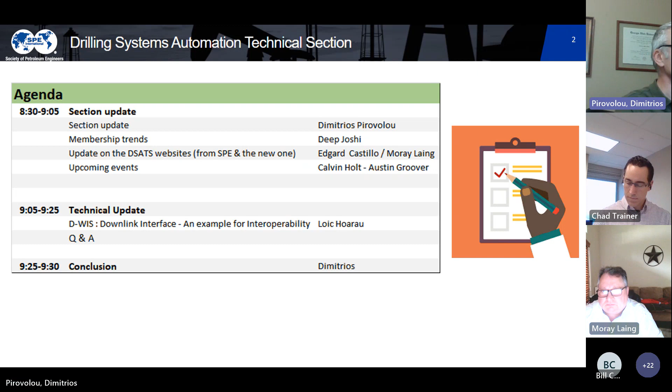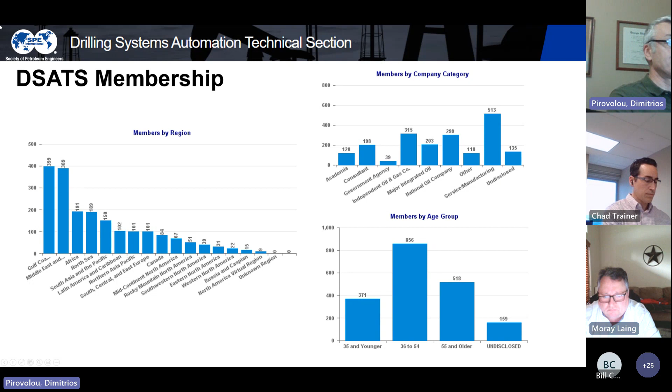Good numbers there. The next couple of slides, maybe Moray can walk us through, shows the activity and the level of interaction that we have in the new website that we run in parallel. Go ahead there, Moray.

But what I would say is, to keep people coming to the site, we need to post content that's specific to DSATS. I think one thing I would like to do is have one of the subcommittee chairs on a monthly basis post like a blog entry of what they're doing now, what their intent is, something like 200 words with some kind of graphic to show it.

We could put some kind of material onto the website so people can come and see what the different teams are doing. I don't think we should do everybody all at once, it'd be too much. But I throw it out to the subcommittee chairs, if you're interested in writing something, reach out to myself and Edgard, and we can help you with that and put some material up there.

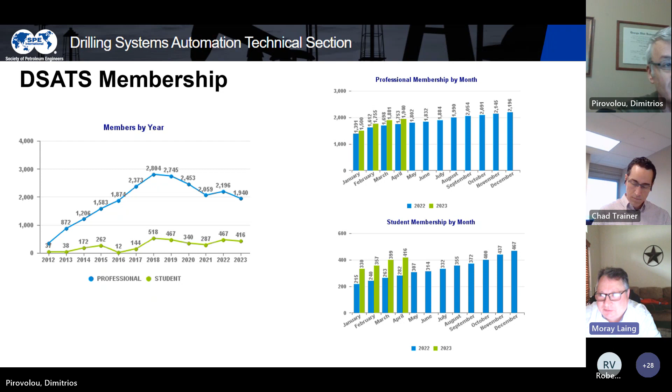So just FYI, interesting, thank you Robert. It's outrageous, Robert, unbelievable that they would do that. It's censorship. Well, it's nowhere official, but anyway, if you look it up, it doesn't exist anymore there.

One more slide here, Moray. You want to talk us through that? Oh, this one must have come from Edgard. I don't know if Edgard's on the call.

So I don't really know whether it's valuable keeping that. I don't think we remove it at this point, but Edgard and I are not going to focus on this over the next month. We're going to focus on getting content about what the different subcommittees are doing, and I think that's the key.

Thinking about it again, I think it was done with the right intention, but really that functionality, people use the LinkedIn DSATS website for that. So it's almost a decision point whether we keep it or just remove it and say discussions happen on LinkedIn. Most people seem to consume information rather than contribute.

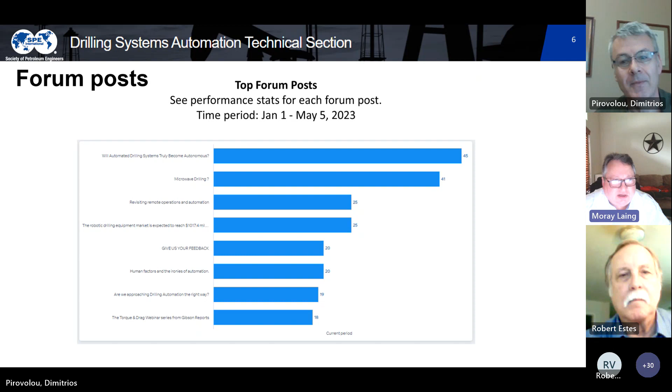We're getting plenty of views, but only the opinions of 4 people. That's the problem. Nobody wants to put their name down and write a reply or a comment. So at some point we maybe need to make the decision that if it's not worth continuing the effort, then we should call it.

You want to say something, Mark, about the study you did? All I did was a survey of all sorts of technical sections and other subcommittees and other organizations. AADE was very forthcoming with how they use web-based tools, discussion forums, videos, websites, things like that. One of the things that's clear is discussion forums are not working at all across any of them. It's just a functionality people are not using. You have just a few people who are very vocal and no one else contributes. The other thing is there's not one tool that works well for everything, so you need a mixture of things.

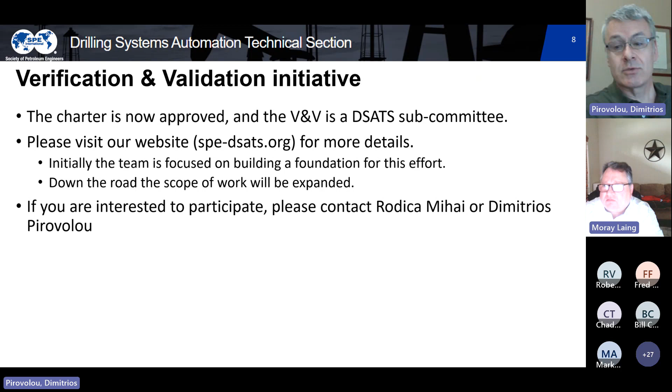That's really all I can add at this point. This is something we have to address—year over year, participation seems to be declining, unfortunately. Even the teams from Norway that have been very consistent seem to be dropping out.

NTNU—I don't know, Fred, do you want to add something here? NTNU decided to use their rig for master's and doctoral research rather than in a robotics competition. So they're still involved with the equipment, but not involved with the group.

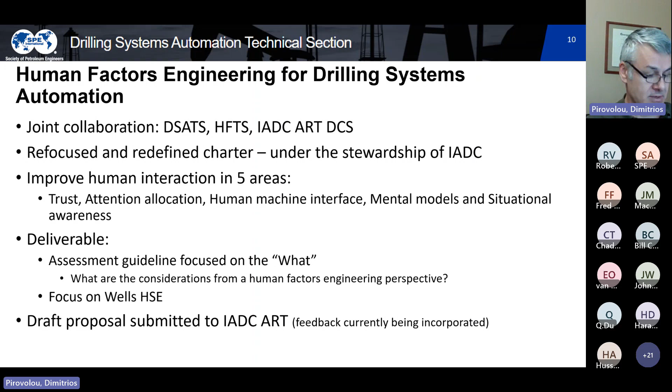Next, I have a few minutes of updates on upcoming events. So we have one coming in 10 days or so, an update, joint update by Eric, Carlos Damski, and John Macpherson on the work that they have been doing on drilling data quality and uncertainty. It's going to be a webinar. You can register through SPE's website, and we have a few more spots open for the remaining of the year. And if anybody has something, technology development or some deployment, some field trial, etc., feel free to contact me, and we can try to fill these spots. They are open. I have a few people in the pipeline for technical presentations, both as webinars or during these community calls, and we'll try to share as much of this knowledge as possible throughout the year as we go.

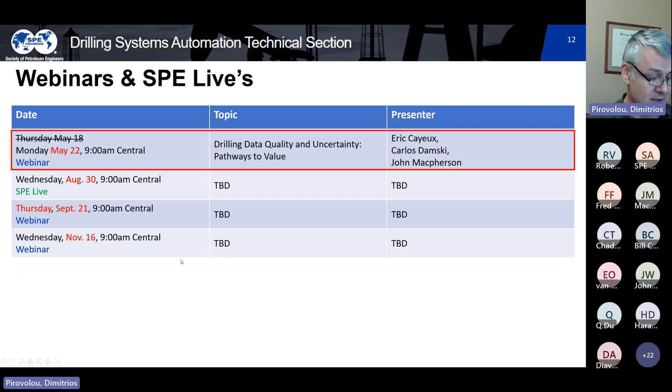So along the same lines, there is the special session that Austin is putting together for the ATC in October. I think I saw Austin here on the call. Yes, I'm here.

I might have to jump off pretty soon. I was one of the ones that had to leave at 9, but the person I'm meeting with is late, so I can give a quick update.

From the original proposal, we had a 90-minute time slot we were seeking, but given the options available, we're pivoting to a 60-minute event that'll take place on Monday. I checked again with Greg and the SPE staff if we could get a more favorable time and still have the 90-minute section, but that wasn't the case. So we're going to have a 60-minute session.

We're still working, and we'll have to slightly tweak the format of the event so it actually fits into the 60 minutes. There's a group of people helping me work through some of these concepts. Anybody on the call who'd like to be part of that group is welcome to participate.

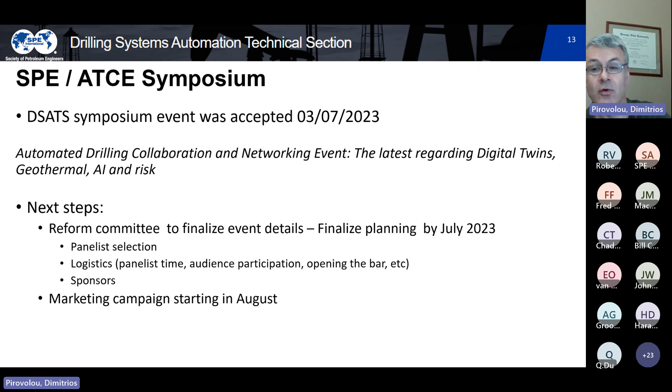Thank you, Austin. I think it's going to be an interesting event, especially for younger people to network and learn about these technologies, what's going on. All right, so that's pretty much it for the regular update of the section activities.

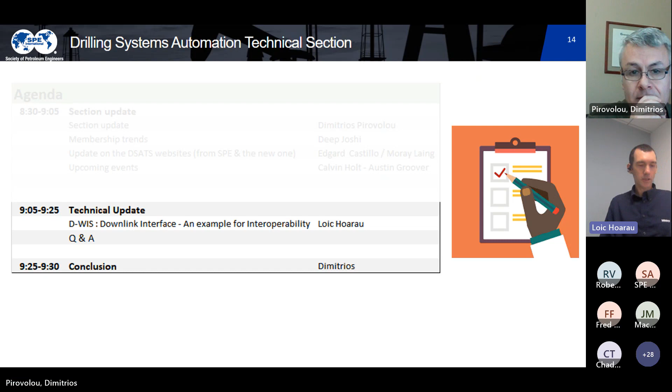The next part is the technical presentation from Loic. I see he's on the call. Loic, I have the slides, the latest version. I can go through them and you guide me, or if you want, you can share from your screen, it's up to you. I can share, I think I made some quick updates, so that's why. Let me try and share here. Okay, can you guys see my screen? Yeah. Okay, all right, hold on.

All right, thank you for inviting me, Dimitrios. So we wanted to give you an update on what we're doing in the DWIS group on the standardization of ADCS interfaces, specifically on the use case of downlink. As Dimitrios said, this is a work in progress right now. We had several sessions to brainstorm what we wanted, and wanted to share with you what we have.

My name is Loïc Hoarau. I work for SLB, I've been with the company for 20 years now. I started working with the development of downhole tools, so LWD, MWD, and RSS. Did a stint in seismic manufacturing, but for the last 5 years I've been working as a software project manager in DrillOps, so I'm very interested in automation of drilling processes.

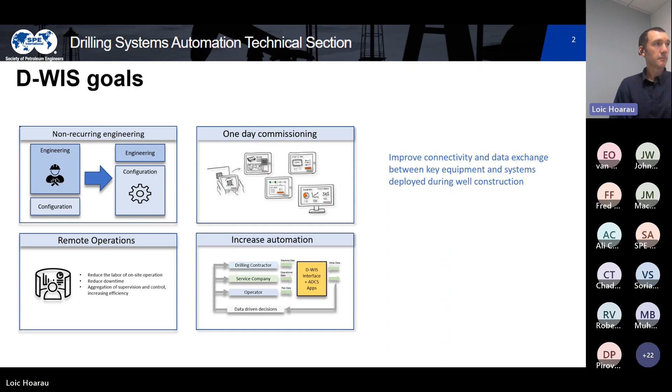The DWIS organization is split into several work groups looking at different aspects of the standard. I wanted to show you where we fit in this architecture. There's one work group dedicated to working on this architecture, which is basically to promote how multiple advisor applications could work in a framework to send advice and perform drilling processes in a coordinated way with all of this equipment.

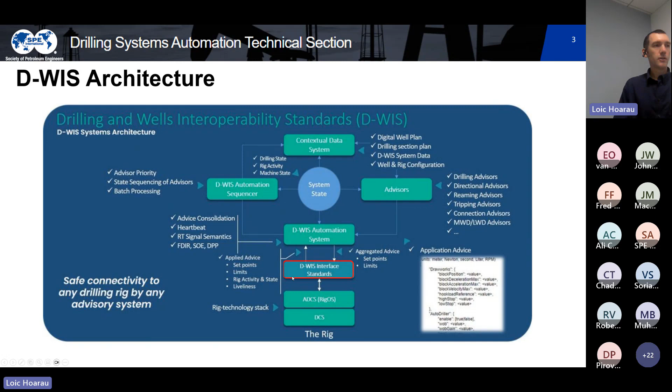Where we fit in today is on workstream 1, the DWIS interface standards. That's basically the interfaces to the ADCS that we're going to talk about. So this is workstream 1, the ADCS software interfaces.

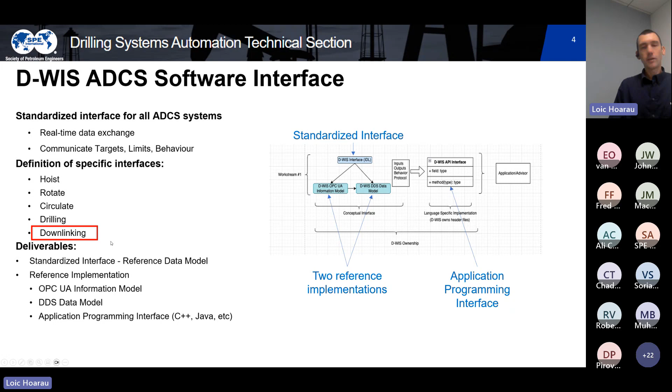How we are working in this group: we have a host of specific interfaces that we've identified and want to standardize. Here are the ones we've already worked on: hoist, rotate, circulate, drilling, and the one of interest today, downlinking. So we start by agreeing and defining an abstract model.

The reference data model is expressed in an IDL language, to make sure we agree on the concepts, the data that needs to flow back and forth, and the commands we'd like to send back and forth. This abstract model can then be instantiated into reference implementations in the protocol of choice from vendors, letting the industry decide which reference implementation would be the most adapted to our needs and successful in the field.

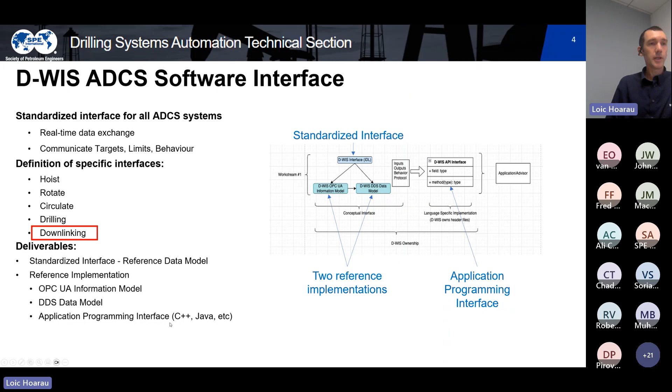So, reference implementation on some protocol, and eventually that could translate into vendors giving their SDK in their favorite programming language and programming platform as well.

Now to downlinking, to the downlinking requirements. For this particular aspect of the interface, this is what we set out to do. Downlinking is the process of sending a message to the downhole tool using surface equipment to send a signal. For this interface to work, we have to be completely agnostic to the downhole tool or vendor.

So we want to be able to send any kind of message and pattern. We'd also like this interface to let us use any equipment that is in control of the ADCS to send this downlink message. Typically, that would be the pumps or the top drive to do a flow or RPM type of downlinking to a downhole tool.

One thing that became apparent in our discussion is that the driller, the user, needs to be in the loop and needs to know what happens and when, to allow a downlink operation to start. So the interface should provide the capability to notify the driller and get approval before the actual operation starts.

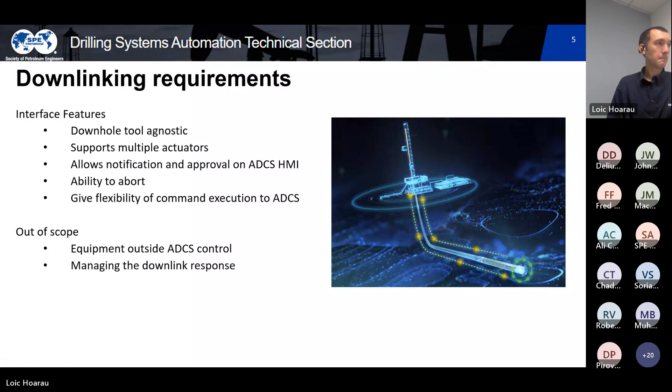The second method is where the advisor keeps the knowledge of the pattern internally and feeds it piecemeal to the ADCS, staying in control of the timing of the transitions to the equipment it wants to use to send that message. Using the example of flow setpoints, you still need this downlink interface authorization mechanism to be used by the advisor before starting the downlink process, to meet the requirement we set up previously.

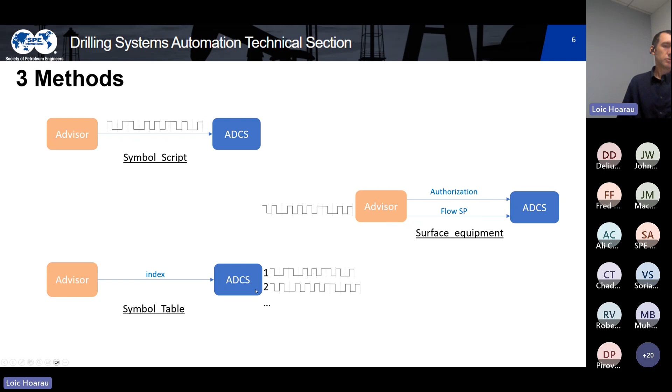The last method we wanted to allow through this interface is what we call the symbol table. In that case, the advisor vendor and the ADCS vendor exchange the full list of patterns that can be sent, so a table, and agree on an index to reference those patterns. That simplifies the communication between the advisor and the ADCS, but it requires the parties to agree and exchange all of this data and maintain it offline. We added this method mostly because we recognize that already in the field we have systems very close to this, and that would be the easiest way to upgrade to the proposed interface if they wanted to use that method.

Now moving on to the reference model. This is what you would have on our GitHub website, describing first the data we would need for the status. We define a structure with the requested downlink ID, a permission parameter, a downlink status parameter, and ways of understanding where we are in the completion of that downlink activity, with a percent complete and also a duration. This is data that would be accessible to anybody that can read from the ADCS to know what is happening in terms of downlink on the platform.

For the request, it's a bit more complicated. There's a method where we're sending a lot of parameters to specify how we want to send a downlink. First is a request status, whether it's a new request, aborting, or completing the downlink. Then the method, as we saw on the previous slide with three options: through the scripts, through a table and an index, or using the surface equipment and directly controlling the timing of the transition by the third-party advisor.

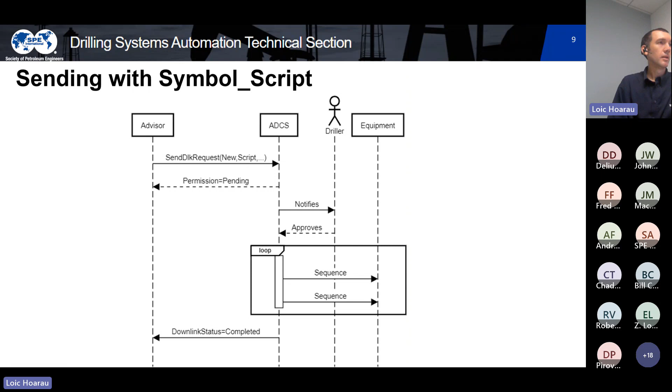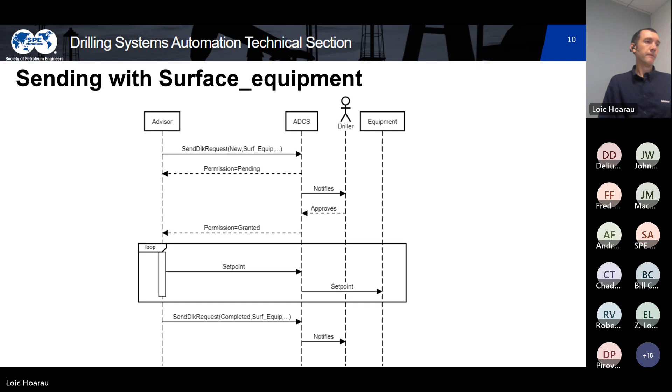Right, so that was for the reference model. Right now we have in progress a work on an OPCUA implementation that's building on an OPCUA model that we had already defined for the previous interfaces we worked on. In this construct, there's two main categories of objects: the observables and the controllables.

The observables are basically objects with metadata to know which kind of unit is associated to them, and any client that's connected can identify them and read their value. The controllable objects appear in control groups and have infrastructure to let the ADCS give access to one client at a time to write to them.

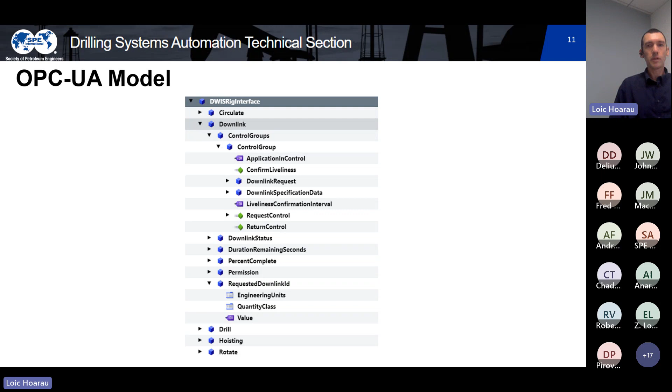So I've defined here two other types of objects which are controllable, that an external client can write information to - that's for our downlink request and our specification data. That's basically trying to translate all the concepts we have in the reference model into a practical implementation.

So that's where we are right now. We're in the middle of working on this interface. We need to continue and implement this OPCUA model and test it, making sure that our assumptions on the interface are actually valid.

Ideally, we would also have other implementations on another protocol just to make sure this model is actually solid and validating our use cases. We want to integrate that in future demos, and then the work will restart on new interfaces and new scopes. Right now we have, I would say, those five interfaces that would meet the use cases of ROP optimization mainly, and downlinking. But there's a lot more that can be done and developed.

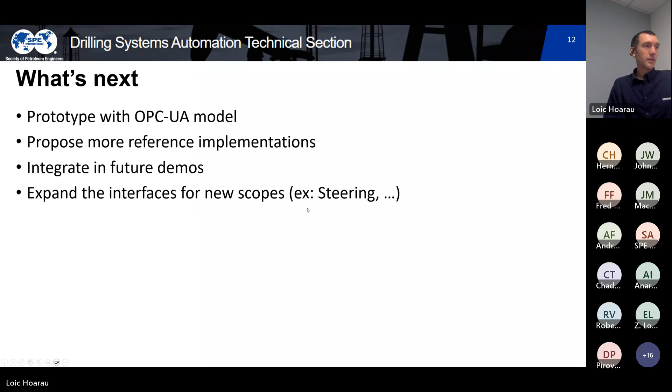So that's what I had for today. I want to thank all of the members of workstream 1 that are contributing to this work and these discussions. I put references and links where you can find the work in progress on GitHub, and our reference on the DWIS website.

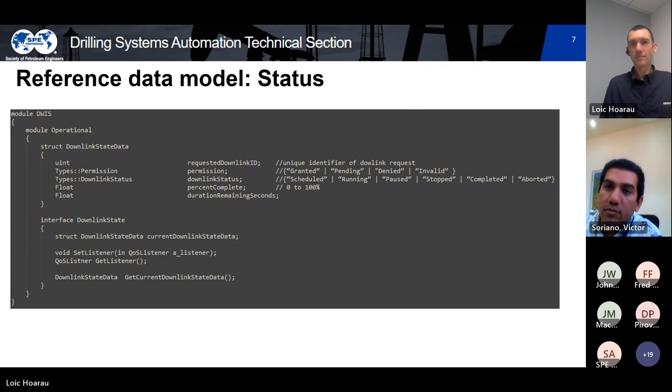We need to invite everyone to get active in these efforts and initiatives on the forums, in the work that is going on - whether it's the V&V, the DWIS, or human factors - these affect all of us in one way or another. So I'd like to extend an open invitation for anyone to jump in.

Of course, one ever-present goal for DSATS is to interact with other technical sections in SPE or even outside, with IADC and other entities. So if you have connections with people even in other industries that we can learn something from - in terms of automation, verification and validation, human factors, protocols, everything - let's discuss it and see how we can benefit and what knowledge we can bring in.